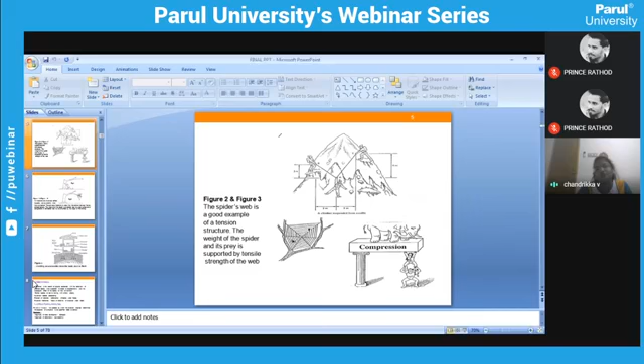This next one is a very good example for our compression structure. An elephant is standing; on one side a column is there, and on the other side some persons are there. When compression load is given, the people will fail, and the column will buckle and also fail.

When comparing with our natural component, we can easily know how the members will fail and what scenarios happen inside, how it will deflect, how it will bend. While seeing our previous slide, we get an idea of how the structure actually behaves.

In this slide, this is a building figure in which there are many types of load: dead load, which is nothing but the entire building, then snow load, water tank, wind, people, furniture, car, etc. All this load is transferred directly to the foundation. If the foundation is stable, the load transmission is appropriate. For the structural part, we want to design only based on these components: structural component, dead load, live load, and other third-grade loads.

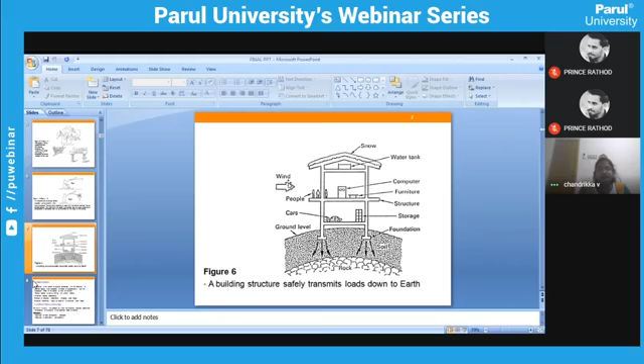Basically, what is mechanics? Our structural analysis is mainly based upon mechanics. It's nothing but the behavior of physical bodies when subjected to some force or displacement, and the subsequent effect of the body on their environment. There are two types of mechanics: one is static, which is uniform velocity, and the other is dynamic, which is accelerated. Our structural analysis is based on structural mechanics, which is the behavior of the entire structure under various kinds of loads, and strength of materials, which is the deformation of bodies under force.

While having a deep knowledge in structural mechanics and structural materials, we can easily move to structural analysis. Structural analysis is the main basic for all structural engineers, mainly used to determine the response of an entire structure on a specified load and the action based on the loads.

What are the responses of the loads? Two types. One is collapse, which is nothing but failure - the magnitude of force which develops the failure is called collapse. The other is serviceability: the entire structure in its service age, how it deforms, its magnitude, its modes, are the responses of the structural analysis.

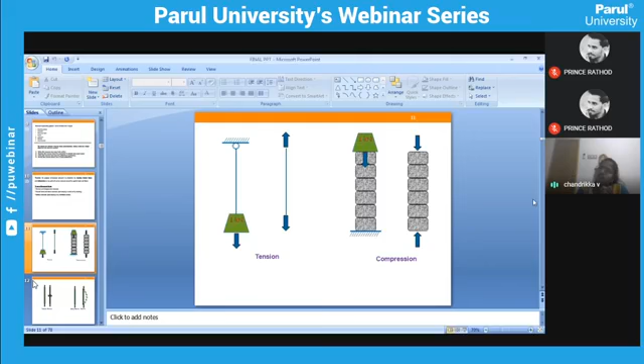Take some soil bricks, for example, then provide a 1 kilonewton load. Then you can feel how the compression is going on inside these clay bricks. This is a tensile failure - you are pulling at both ends, and the tensile force is acting.

So how will the failure mode be? It will break. A good example of tension failure is your mild steel, which is subjected to loading in your loading frame. One neck will form and it will break into two parts.

But moving to compression failure, if the span is long, based on the slenderness ratio - if the length is high, it will buckle and fail. If the length is small, it will crush and fail.

The important things in structural properties are only two: one is strength. What is strength? Just compare with yourself - your strength is the amount of stress you can take. If you are in a stable condition, you have strength. If the stress leads to your failure, if you are crying, then you have literally failed - you can't take that stress, so you get failed.

In the same way, compare with a building. If the internal stress acting in the building can be taken, the structure is in good mode. If it starts to deflect and fail, the entire structural member will surely collapse. Then moving to stiffness.

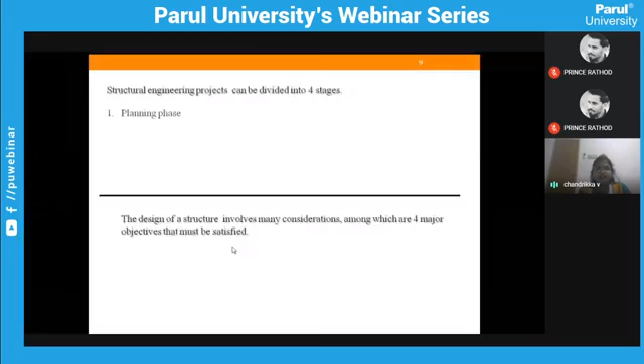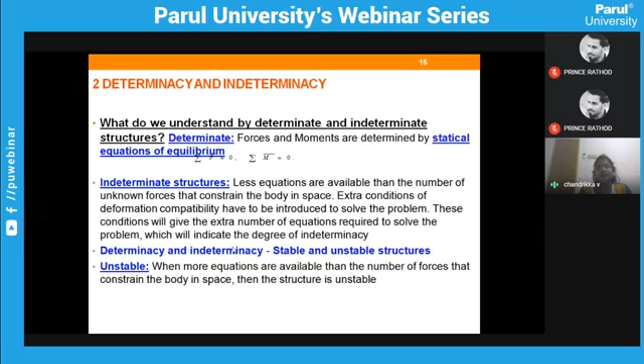Here we can easily see that summation of forces is nothing but force in the horizontal direction, Fx, the vertical direction, Fy, and Fz in the third dimension. For a moment, when the force is in the horizontal direction, the moment will be perpendicular to that force. For example, if it is Fx, then your moment will be about z. Similarly, when the force acts at a perpendicular distance, you get your moment. So the moment always acts in the perpendicular direction. As I discussed, this is the detail about determinate or indeterminate structures.

Then it's very necessary to discuss cables in our structural analysis, because cables are very simple and very useful structures, mainly in suspension bridges, roof structures, and mostly transmission lines. All our lines, say electrical lines, television lines, are cable lines. Mainly tension force acts on them; they take tension, never compression. That's why we provide sag in all cable members.

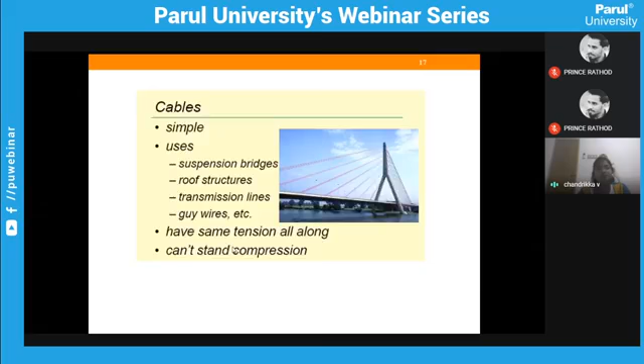Then arch, this is a wonderful example of an arch. Two types of arch we will discuss in structural analysis. One is the two-hinged arch, which is an indeterminate structure. Another one is the three-hinged arch, which is a determinate structure. An arch only takes compression force; it transfers all the compression force to the ground and it will be stable. This is an example of an arch.

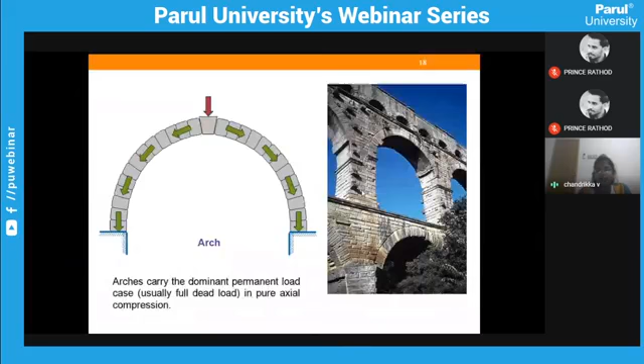Next, we'll go for truss. What is the use of a truss? Trusses play a very important role in all industrial buildings. Without trusses, our industrial buildings are literally zero. There are also two types: one is indeterminate, another one is determinate. See here, is this determinate? Yes, it is determinate. For easy calculation in our design, we have converted it. But practical truss structures are always indeterminate.

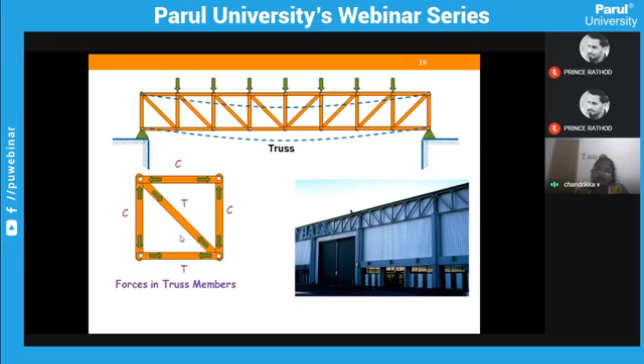Why indeterminate? Because we provide stiffeners or other diagonal members in order to transfer the load equally. See here, in this truss we could simply give one square, but we provide one diagonal member connected with hinges. The load is transferred here. The upper member and left and right sides are subjected to compression. The lower member and the diagonal member are subjected to tension. Equal distribution of member forces leads to safety in our truss.

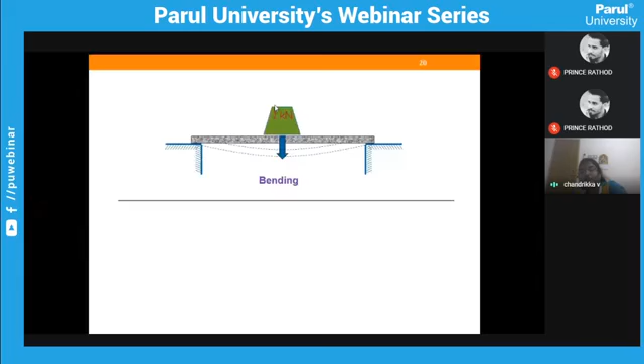Here, this is an example of bending. We are applying a 1 kilonewton load. The beam is actually bending, but we can't recognize that it's bending. But deflection and bending are taking place. When the load gets higher, we can see the actual deflection of the beam. This is an example of bending of a beam, a horizontal member.

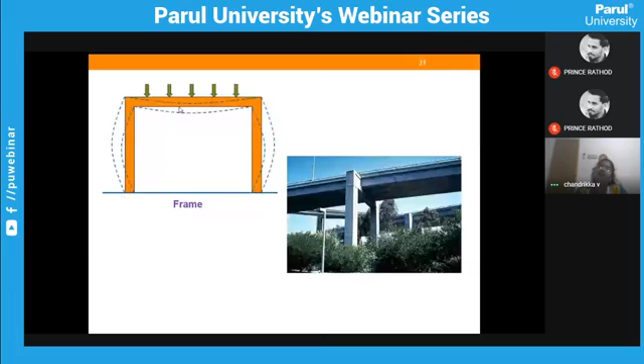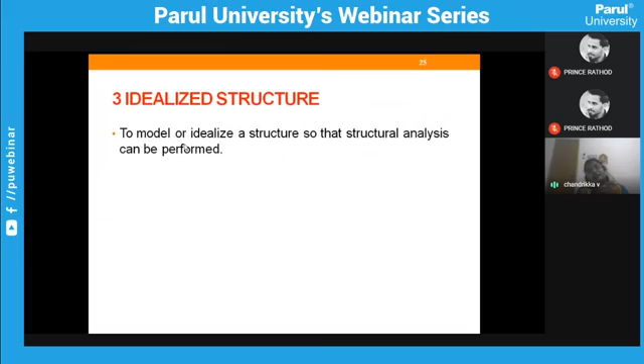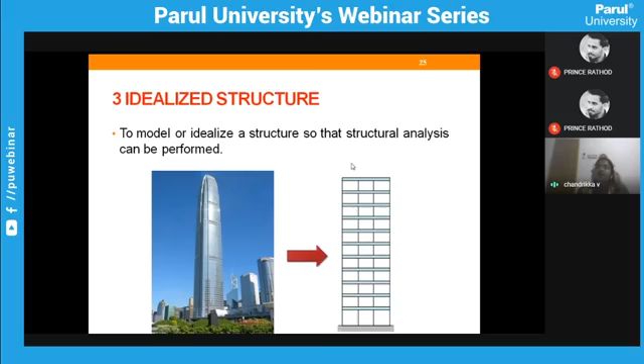Idealized structure. What is idealization? Idealization means this is a structure and we want to idealize it. How? Through structural analysis. This structure is idealized in the form of a frame with a number of bays. Why do we want to idealize? Because we want to determine whether it is structurally stable or unstable based on different types of conditions, in which our support condition will play a major role.

What are the support conditions? One is pin connection, next one is roller support, third one is fixed support. Here I will give a real-time practical example. Pin support, you are well known about, it's a hinge. Take 3 different scenarios. At present you are in your room; take your door under lock. Yes, it is in fixed condition because you have locked your door.

Is there any horizontal movement in your door? No. Is there any vertical movement in your door? No. Is there any moment? Only if you open your door and turn can you enter or exit the room. It is an example for your fixed support. Take roller support. I will go in this reverse order because then only you can understand what I am saying. Roller.

Roller is nothing but, take one sliding window. You are sliding your window. If the roller is in the horizontal direction, you can move your window only in the horizontal direction, like this or this. This is a perfect example for your roller support. Then your first one, pin connection. Pin connection is nothing but your ordinary window. The window is supported with a pin connection. You are opening your window, closing your window. There, moment is acting and vertical deflection is acting.

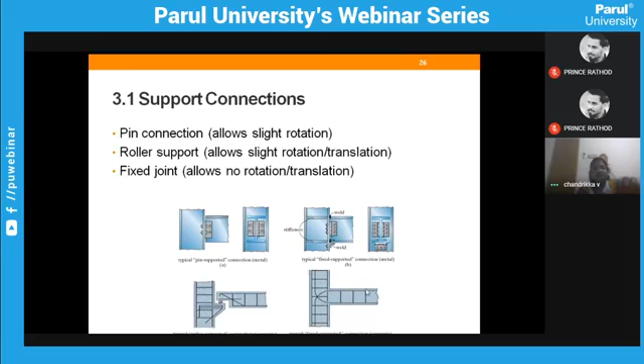So in a pin connection, there will be a slight rotation with vertical force. Roller: in whichever direction you give your roller, in that direction your rotation or translation will take place. Then the third one is your fixed support, which never allows any kind of rotation or translation. See, this is the example which I gave you. Next, same. See here, this is a beam, a slotted hole, and you are connecting with an anchor bolt. This one is an example for your roller. One hole and you are connected with some anchor bolt. It's an example for roller.

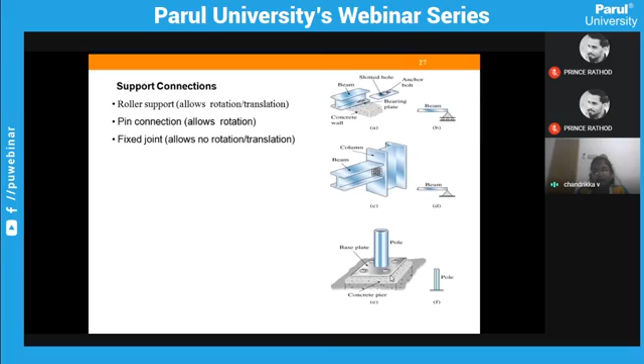Here see, pin. This is a pin connection. Here only rotation will take place. Forces in the vertical direction will take place. So it's pin. Then the third one is one pole, fixed. So no moment or deflection will take place in any direction, no translation. A beam has a variety of supports. What types of support? As I told, this one is roller. In whichever direction you are giving it, only in that direction the force will act.

Next one is your pin support, either vertical or horizontal. If it is a horizontal member, we can neglect horizontal force. Why? Because the horizontal forces act on the same line of force, so it becomes zero. So we will take RX and RY. This is a fixed support. Now you are taking RX, RY, and also one moment. Roller, single degree of freedom; pinned, 2 degrees of freedom; fixed, 3 degrees of freedom. Degree of freedom is nothing but DOF.

We well know the definition of degree of freedom. Yes, I agree. But in a practical case, how can we understand degree of freedom? It is very common. The member is converted into one line and two nodes. One horizontal member, a beam, will have one horizontal line and two nodes. Based upon the supports, the node displacement or rotation is considered as DOF, degree of freedom. Roller will have 1 degree of freedom.

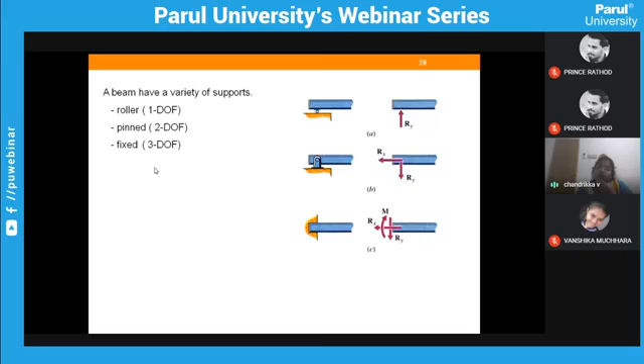How? Roller, which is a small node, how will it deflect or rotate? It will have only one direction of force, perpendicular to it. Yes, it's RY, 1 degree of freedom. 2 degrees of freedom means for pinned, RX and RY. For fixed, 3 degrees of freedom. What displacement and rotation are going to be restrained? RX, RY, and its moment. This plays a very important role for idealization.

Now we have one small doubt. We want to idealize a real structure in order to perform modeling. See, this is one actual structure. Here is one hook, and some load is hanging. Which kind of support is here? It's a fixed support. Here it is one pinned. This one is a rigid support.

We used to study the moment resisting frame. No, this one. This is a rigid support. Here, fixed support: A is converted into fixed support. Here B is rigid. And at point C, one force is acting.

This is the main purpose of your idealization of your structure. So you are able to convert the actual structure into an idealized structure in order to perform modeling and to perform the analysis of your structure.

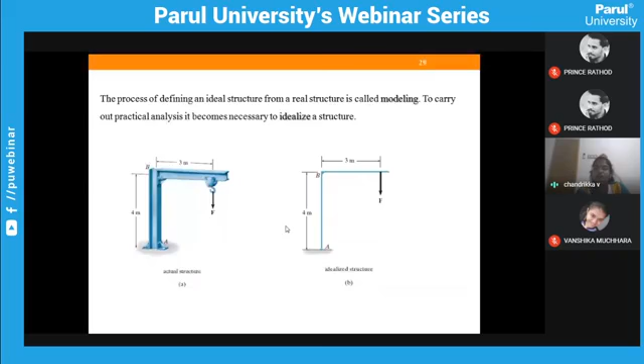Beam, yes, absolutely, it is classified into two things, determinate and indeterminate. See, what are the examples of indeterminate beams? Yes, I actually follow indeterminate first in a practical approach, because, as I told, all our practical structures will be in an indeterminate state.

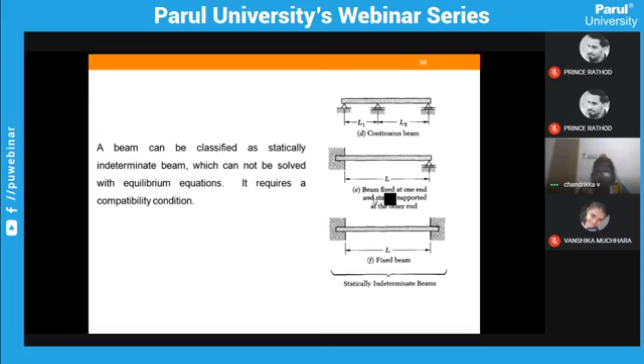First one is a continuous beam, you know, more than two supports, it's a continuous beam. Then one where one end is fixed and the other end is supported with a pin. The next, the fixed beam. Variety of loads. There are many types of loads: point load, distributed loads, and applied moments. See, these are the examples.

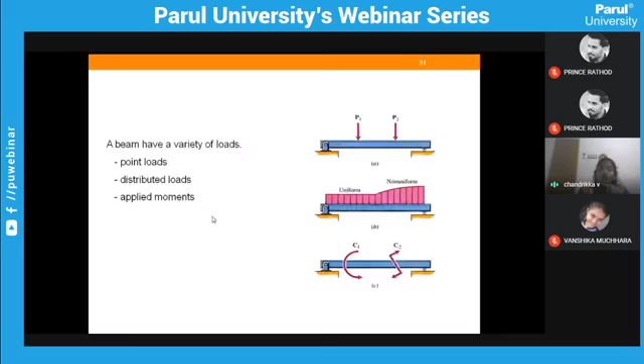Point load, either it may be a single concentrated point load or 2-point load, 3-point load. Then distributed load, whether it may be uniformly distributed or non-uniformly distributed. Then applied moments. Moment will be like C1 or C2, either type.

Yes, next, the beam is classified as statically determinate. What are statically determinate beams? A beam which can be solved by the static equilibrium equations is called a statically determinate beam. One is the simply supported beam, next the overhanging beam, and the cantilever beam.

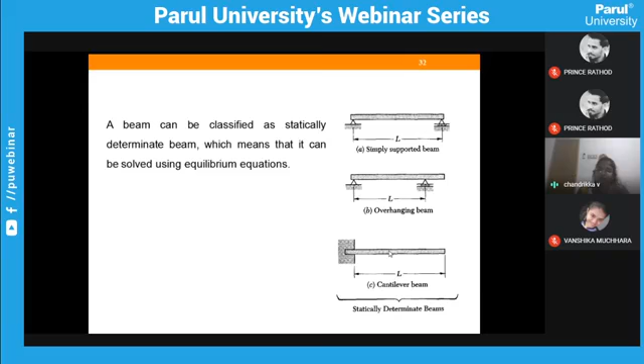Here comes the idealization of the structure. See, in figure A, this pin support. See, this one is a small pin. How it is idealized like this. This one is a pin joint in terms of reinforcement. This one is fixed. See here, fixed. This one is fixed or rigid. Then this one is pin support.

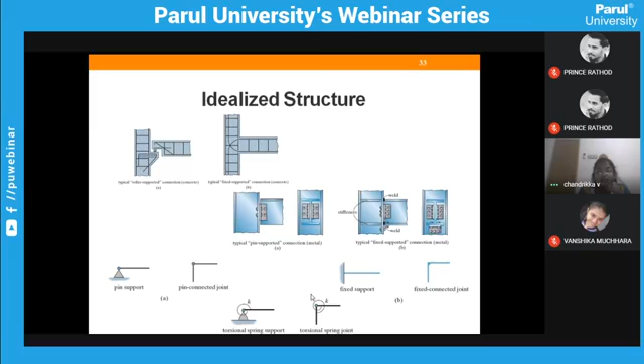I told the example of our window. This one. This can be idealized like this. And this one is our fixed support. It may be idealized either as this or this. And this one is your torsion, moment resisting support. Okay, here the stiffness plays a very vital role.

Then in an idealized structure, all connections and supports are modeled with an assumption. Yes, we have studied many kinds of assumptions. The beam before bending should remain plane, so it should remain plane. The material is isotropic, elastic and all these things. This one, this is an actual beam.

Here, see, it's associated with the pre-stressed concrete girders with pads. See how the support is converted. Here one roller, and here it is fixed. See, next one, this is a pin support. This is an idealization of that beam. Here, see, it's also a pin support.

Here they are using this plate and bolts with nuts. This is an angle. Why are we giving that angle? In order to compensate the deflection. They are giving some angle to make the structure stable. This is a very good example.

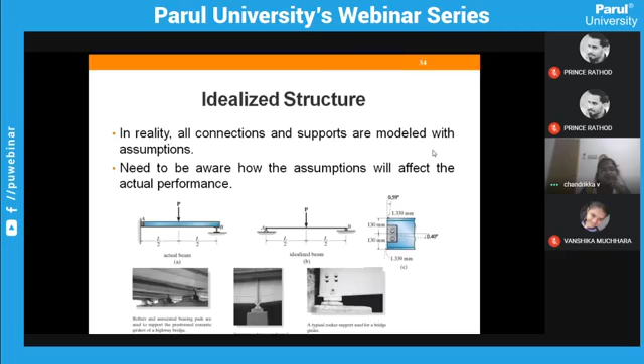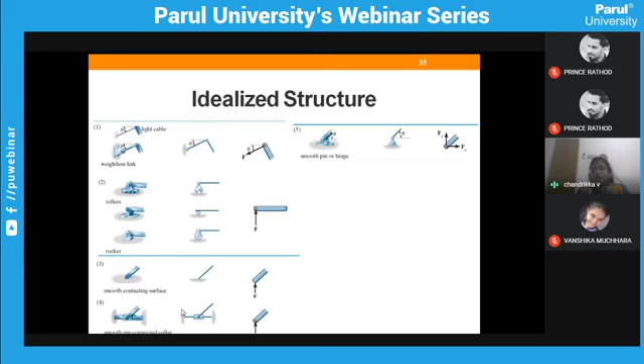Next one is your smooth pin connected collar. These are mainly used in truss members, either in trusses or truss bridges. This one is smooth pin or hinge. Here it is connected smooth. It's fixed, but it will provide two forces similar to our hinge.

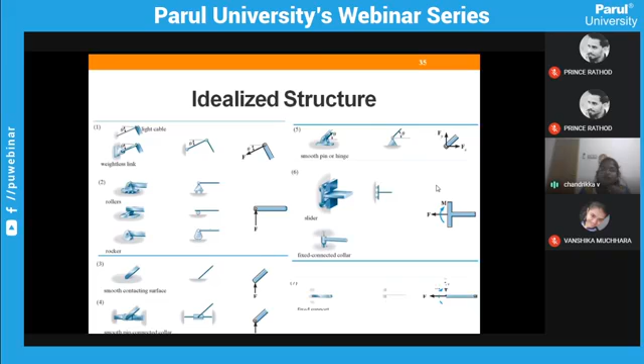This is a slider. A slider provides the force perpendicular to it and also the moment, because it's not rotating, it will govern moment. Then absolutely your fixed support. It will provide force Fx, Fy, and your moment. It will resist all three forces.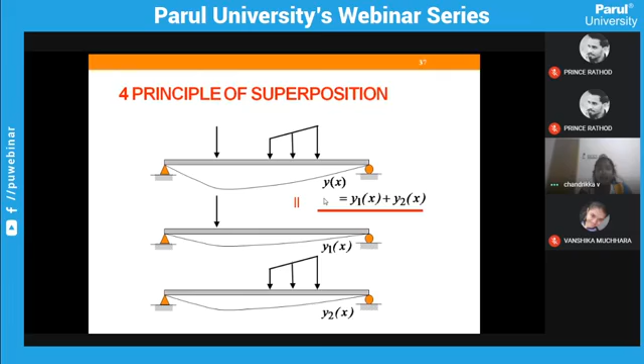What I told in the previous slide, the same thing I have written as a definition. When the structure is subjected to several loadings, we divide them into single loadings, add all the loadings on one side and all the displacements on the other side, and equating both is called the principle of superposition. Here it's a linear relationship between your loads, stresses, and your displacement.

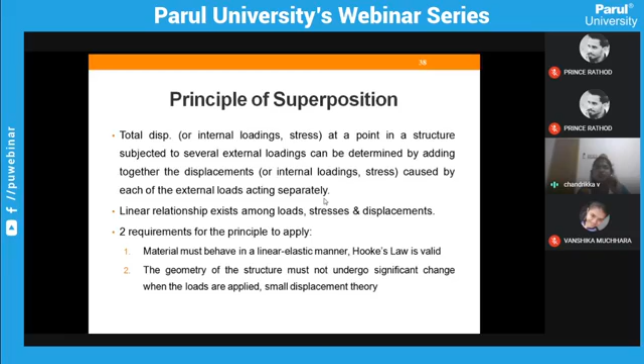The material must be homogeneous, isotropic, linearly elastic; it must obey Hooke's law. If it does not obey Hooke's law, then the principle of superposition will never work out. Then the geometry of the structure must not undergo significant change, because it's a small displacement only. Then coming to your equations of static equilibrium and conditions. It mainly plays a very important role in statically determinate and indeterminate structures.

Summation of F is equal to 0, summation of M is equal to 0. 3D equilibrium means Fx, Fy, Fz. For Fx, Mz will play a vital role. For Fy, Mx will play a vital role. For Fz, My will play a vital role. Why? Because moment acts perpendicular to your force. For 2D, as I told, Fx, Fy, and M naught. For 2D, the third dimension will not be there, so I mentioned it as M naught. This is equilibrium and determinacy.

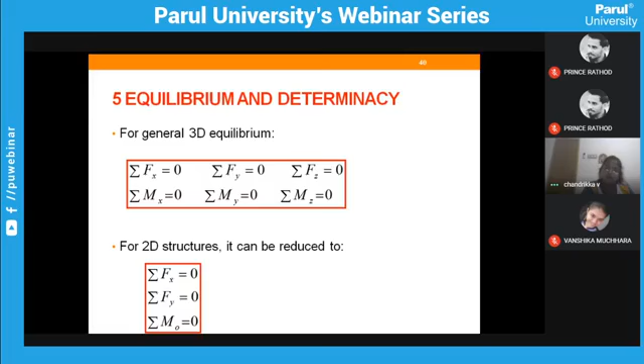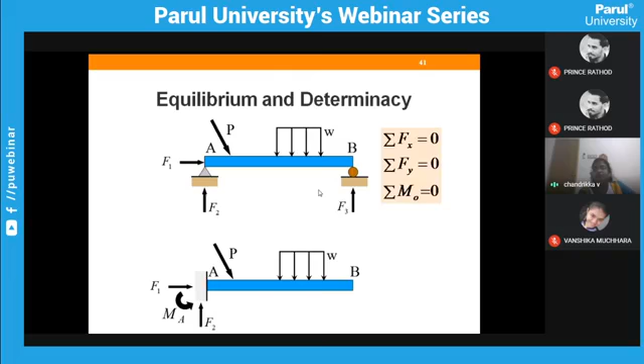See here, this is one 2D structure. Here you are giving one load P at some angle and one uniformly distributed load. Here one roller is there and one pin is there. F1, F2 will be there, and for the roller F3 will be there. These three equations will solve it. Three equations, three unknown reactions, so it is determinate. Then next, F1, F2, moment, fixed support: three equations, three unknown reaction forces, so it is determinate.

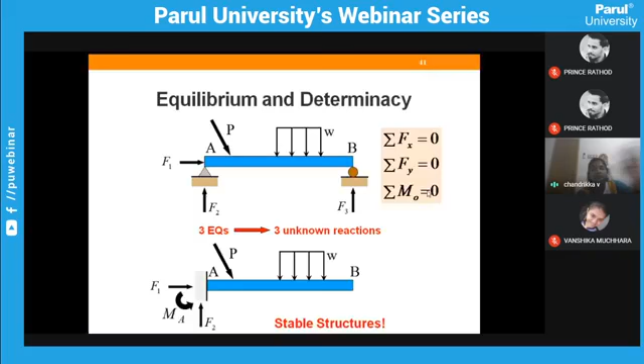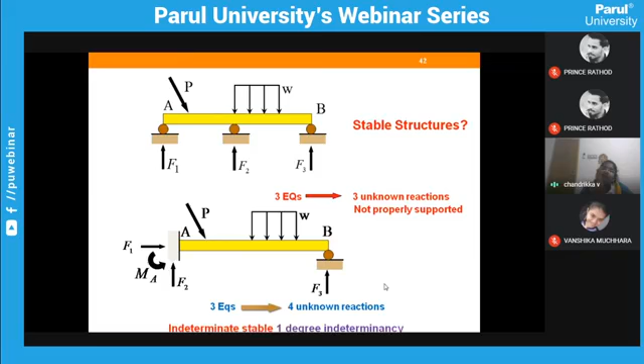Equilibrium equations: a structure which satisfies the static equilibrium equations is known as statically determinate. If it does not, it is statically indeterminate. You can easily manage all this by drawing an FBD, which is nothing but a free body diagram. Then comes the stability and determinacy of your structure.

What is stability of a structure? Equilibrium of the structure should be maintained in all cases of load, which means the structure is stable without any failure mode. There are two types: partial constraints and improper constraints. Partial constraint means summation of Fx is never satisfied. These determinacy and stability problems will come in your exams, so if you can recognize whether it is partially constrained or improperly constrained, you won't waste your time calculating Fx. For partial constraint, the summation of Fx...

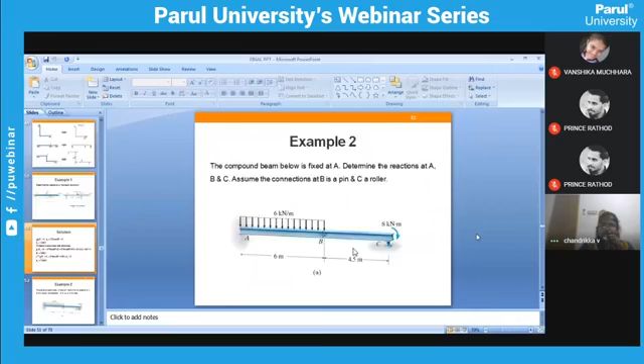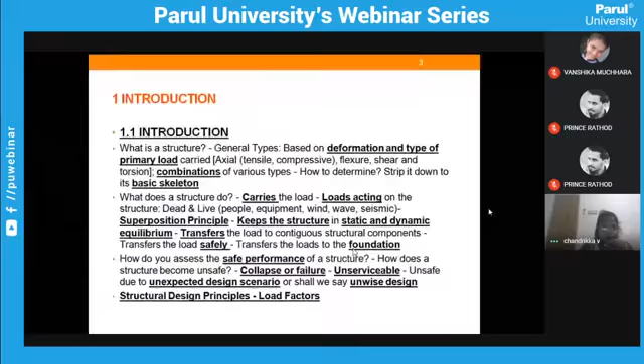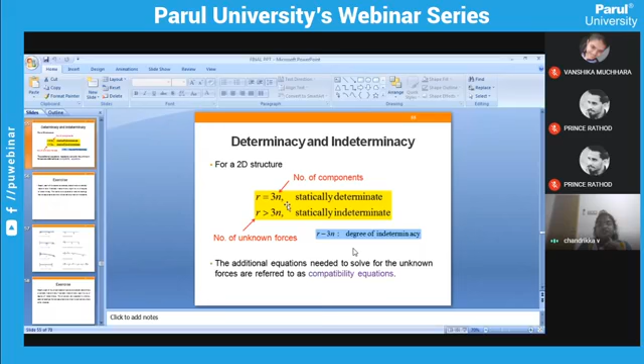This is statically determinate and indeterminate. For statically determinate and indeterminate, there are two main equations: R is equal to 3n, and R is greater than 3n. R is the number of unknown forces and n is your number of components. Using these, you can categorize whether it is statically determinate or indeterminate.

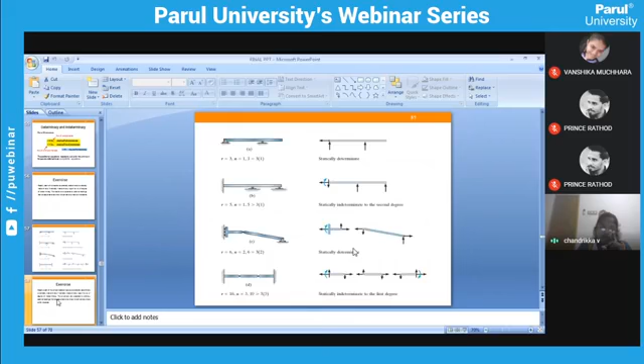See, this is an example of statically determinate and indeterminate structures. Here, many kinds of beams are there: a simply supported beam, an overhanging beam, and different kinds of structures.

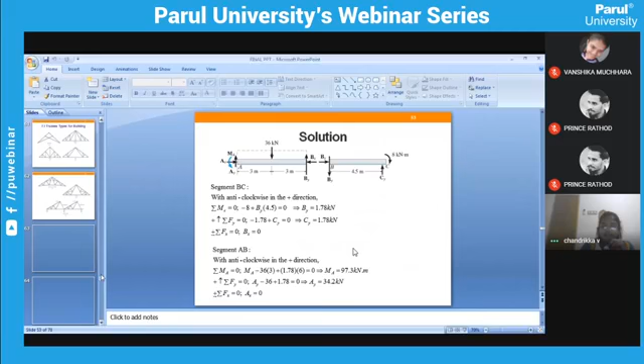Wait. Then I will move with our trusses. Trusses in detail. What is a truss? What is the importance of a truss in a building? Mainly, trusses are used in all industrial-based buildings. Why especially for industrial-based buildings? Because trusses will be used for very large spans, in very vast areas,

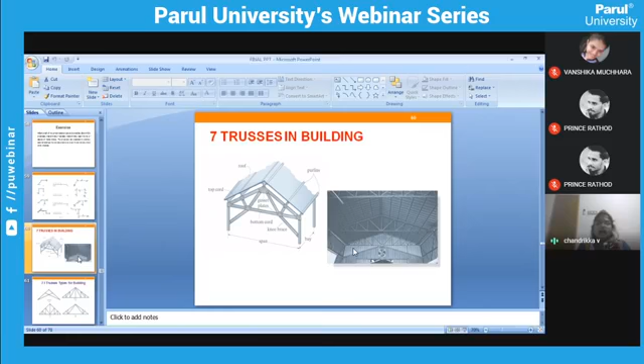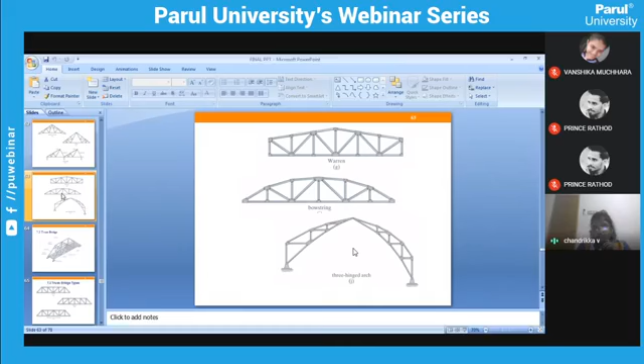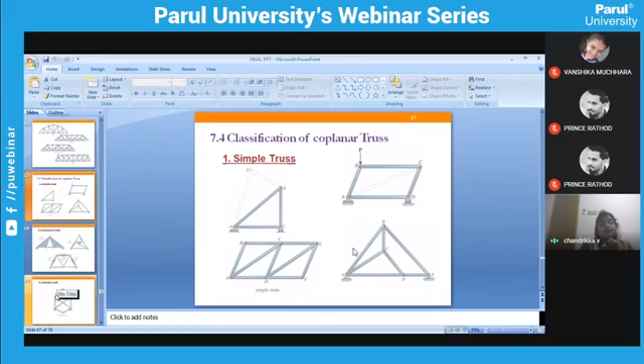Here there are many types of trusses based on some forces. Say for example, coplanar trusses. Coplanar trusses are nothing but those where the forces act mainly in the same plane. And some complex trusses. Why are these complex trusses used? Because in order to provide the stability of the structure, we are giving stiffening elements. Here the stiffening element is given, so the trusses are stable in extreme load conditions when we are including some load factors. The next one is stability of these structures.

These structures can be determined by using B plus R is equal to 2J, which is statically determinate, and if it is greater than 2J, it is statically indeterminate. You may have learned it as M, but here I took it as B. Why? Because here I have mentioned B as the number of bars. So for easy understanding, I took B as the number of bars.

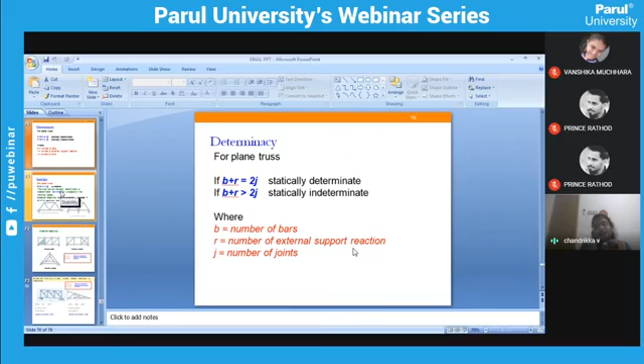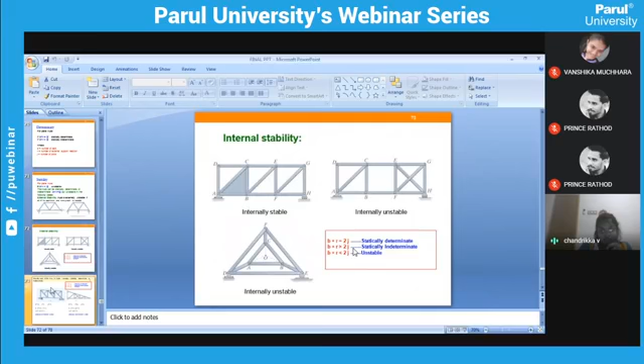Then next is the stability of the truss, whether it is determinate or indeterminate. Based on that condition, these three equations: B plus R equal to 2J is statically determinate, if it is greater than 2J it is statically indeterminate, and less than 2J it is unstable.

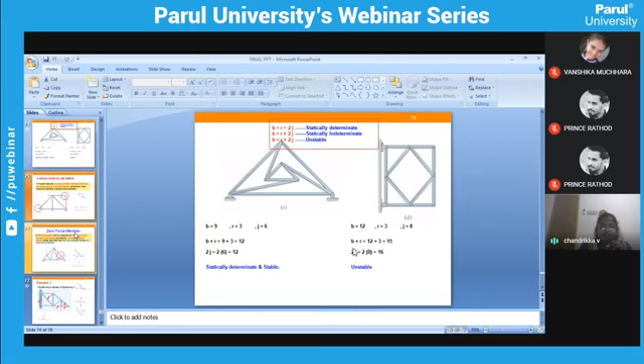Then next one, zero member force. This is a main important criterion for all competitive exams. How can you find the zero member force? If a joint is having two non-collinear force members. What is collinear actually? The forces acting in the same line of action. If the forces are not acting in the same line of action, then it is non-collinear.

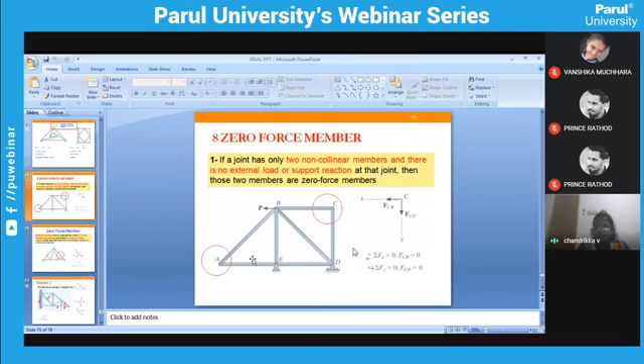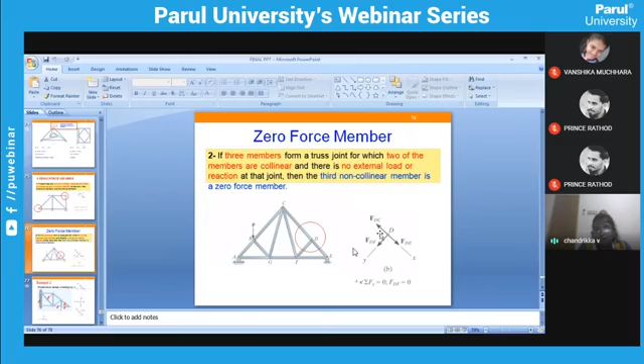So keeping the points statically determinate and indeterminate, mainly when discussing trusses or any kind of frames in competitive exams, we are able to identify first the support reactions, what are the degrees of freedom, whether it is statically determinate or indeterminate, by using the static equilibrium conditions. Next, you want to find the zero member forces. If you find the zero member forces, then it is very easy. See, all these are zero.